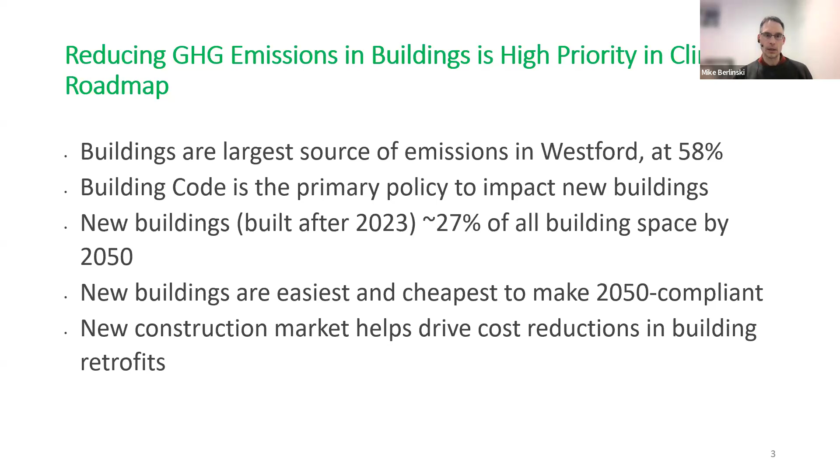We did an inventory and found that buildings are the largest source of greenhouse gas emissions in Westford at about 60%. And the building code is the primary policy to impact new buildings. There are going to be new buildings built, and then they will likely be around for a very long time, including through 2050. So new buildings are the best way to reduce greenhouse gas emissions in this sector and reach our goal in 2050. And new construction really is the focus of this effort.

One thing, how this will benefit Westford, this will help Westford meet its goal to be net zero by 2050 by reducing carbon emissions in the building sector. And it is expected to help lower some operating costs in that sector. This is an important step for Westford to be able to achieve the status of Massachusetts climate leader.

That is an advanced version of the Green Communities program. And as a climate leader community, we would be eligible for additional state funding. As an example of that, Massachusetts just released its first grant funding amount for climate leaders last fall, and that was at a level of $60 million.

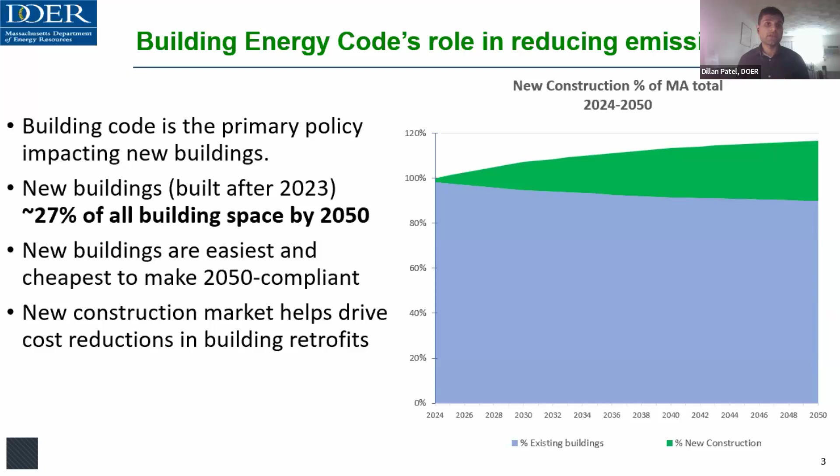Another reason why the specialized stretch energy code is a net zero code is it really takes advantage of the electric sector and the changes to the electric sector that are happening in our state. Now, right now, the generation mix in the state of Massachusetts is fairly carbon intensive. In fact, we get a lot of our electricity right now from natural gas generation. So therefore, heating with traditional electric systems, so electric resistance, is actually a lot more carbon intensive than any form of fossil fuel that exists right now.

Heat pumps, however, because they're much more energy efficient, you have air source heat pumps that are twice or thrice as efficient. You have ground source heat pump systems that are 4 or 5 times more efficient than electric resistance. They're able to heat up a space with far lower electrical emissions from the grid because they require much lower electrical demand. And that translates to lower emissions, especially when you compare it to fossil fuels.

Now, we want to take advantage of the fact that this is a dynamic situation. We expect a lot more renewable energy generation to be in the mix 25 years hence, with a lot more onshore and offshore wind, with a lot more solar penetration. And you may have had the news of Canadian hydro coming our way. So with that, we expect an electric grid that's much less carbon intensive in the future.

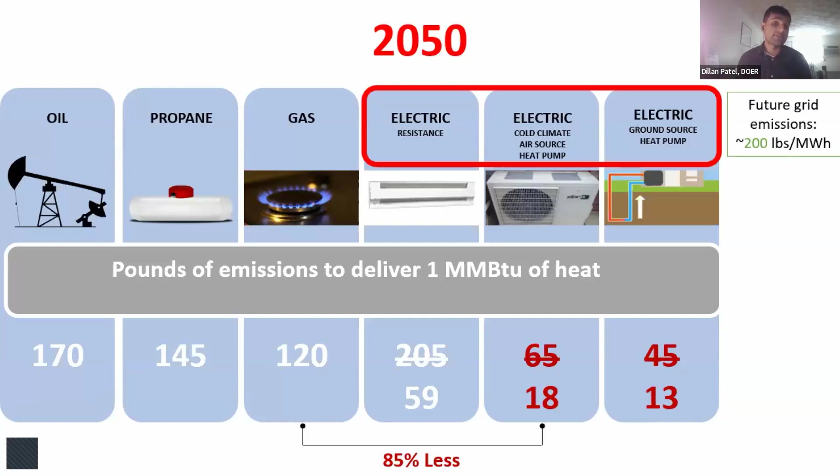And we can leverage that by electrifying our heating systems and other forms of drying and cooking and other building amenities. So with that, with air source heat pumps and ground source heat pumps, the electric emissions of heating up a space are comparatively negligible when you compare it to other traditional forms of heating.

Mike Berlinski had mentioned the Climate Leaders Program. This is a new program that the Department of Energy Resources has launched last year, and it really builds on the great projects that many municipalities across the state, including Westford, have leaned on for energy efficiency and taking their first steps toward decarbonization. The Green Communities Program has been around for over a decade and will continue to be around.

However, we acknowledge that many municipalities like Westford have had some great projects that they've implemented over time. In fact, Westford has received over $1.3 million in DOER funding since becoming a green community, doing a lot of the low-hanging fruit in terms of energy efficiency and reducing their carbon emissions. We can build on that through the Climate Leaders Program. And the specialized stretch code is one of the keys that can unlock eligibility into that program.

And in fact, Westford already has, with Mike and Tom and Beth and a lot of other great people, already established an energy committee. As Mike had mentioned, you have already a municipal decarbonization commitment to achieve net zero emissions by 2050. There's very few criteria to go to become a climate leader at this point. And so what are the rewards for becoming a climate leader?

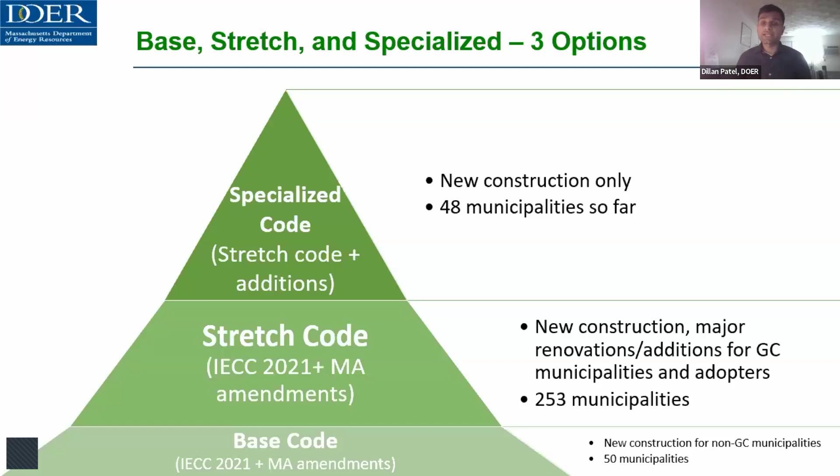The specialized code essentially exists as the stretch code with some additional requirements. And it has been available to adopt for just over 2 years, since the beginning of 2023. And in that short time, there have already been 48 municipalities adopting it across the state, representing over a third of the state's population.

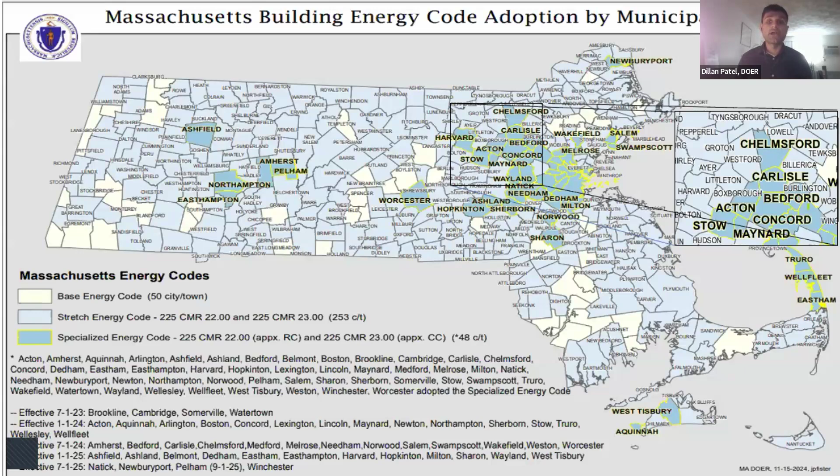And this is a map of those 48 municipalities that have adopted it, highlighted in blue and yellow outline. You'll see that there's a geographic diversity across the state. We have many in Western Mass interested in it. There are cities of different economic statuses, of different urbanisms, if you will, ranging from rural to highly densely urban environments. And you'll also notice that Westford has some neighbors that have already adopted the specialized stretch energy code, including Chelmsford, Carlisle, and Acton. So I'm going to turn it over to Michael to give more information on the specifics of the opt-in code.

Yeah, thank you so much, Dillan. So just to start off, you might be hearing us refer to the code in a few different ways tonight. Dillan said specialized code, opt-in code, things like that. So note that these phrases can be used interchangeably. So the actual code's called the Municipal Opt-in Specialized Code. So I might refer to it as opt-in code or specialized code, and that is really what the topic of conversation is.

Now, the code that Westford currently follows is the stretch code. So if I refer to it as the stretch code, that's what's currently the active energy code in the community. But if I refer to it as opt-in code or specialized code, that's what's under consideration to be adopted. So next slide, please.

So here's some just quick fast facts about the specialized code. So the specialized code is only applicable for new buildings. Any existing home or historic home are not affected by it, so it only impacts new buildings.

There are requirements in the stretch code that are applied to things like all electric homes or electric vehicle charging. And these requirements in the specialized code are the same. So if you're building a new all electric home, there's really no difference in what you're doing in the specialized code than what it would be under the stretch code. So there's nothing new to do for an all electric home, and the EV charging requirements that are in the stretch code are the same for the specialized code. There's nothing new there as well.

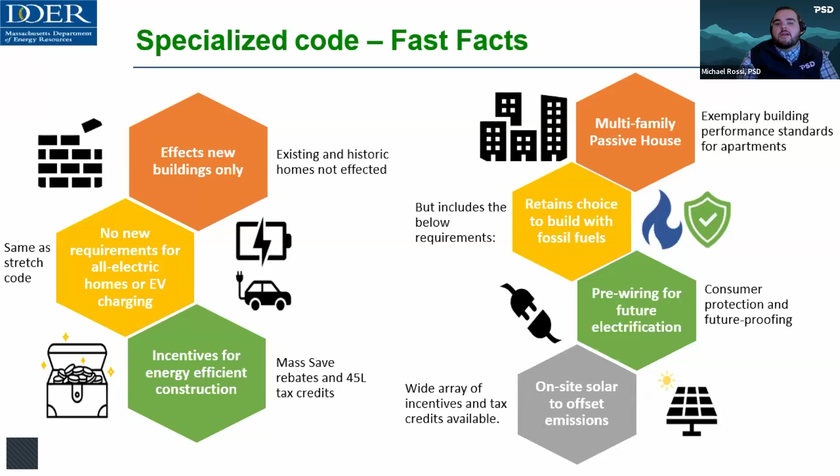So as I mentioned, all electric path, same as it would be under the stretch code, no additional changes. But if you're building a new home and choosing to include fossil fuels, also known as mixed fuel, there's the requirements of the stretch code that are applicable, plus some additional requirements that I previously mentioned. So it has to be electrification ready, also known as pre-wiring. And again, that's having an outlet nearby any equipment currently using fossil fuels for cooking, space heating, water heating, and clothes drying, as well as a requirement for a solar array where feasible.

And as I said, that requirement for solar is to install a 4 kilowatt system for homes under 4,000 square feet. And then for larger luxury homes, there's a requirement for net zero, and that would essentially be enough solar installed on the home to offset the energy use of the project.

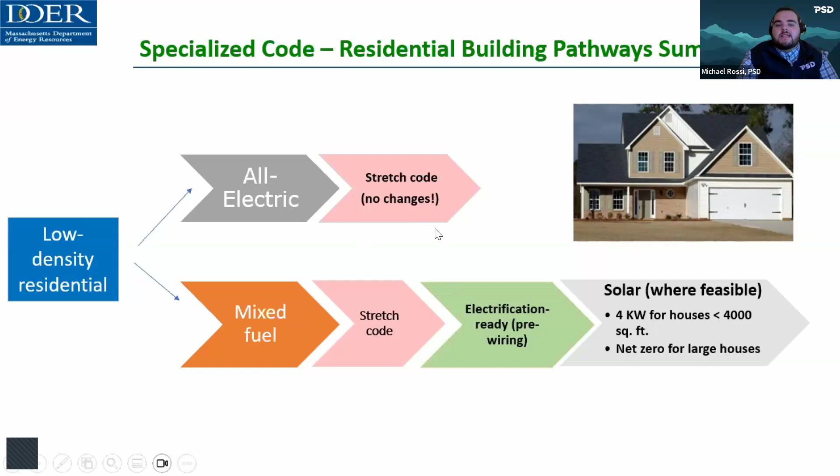So those are the requirements that are added as part of the mixed fuel buildings. We'll dig into that in more detail in the following slides too. So next slide, Dylan, please.

Great. So one of the bases of the stretch code and the specialized code is this path for most projects that follow the HERS index, also known as the Home Energy Rating System. So what a HERS index is, I like to describe it as like a miles per gallon sticker for a car, but for a house, where the lower the HERS score, the more efficient the project is.

So a HERS 100 is essentially equivalent to a new home that was constructed in 2006. Most existing homes in the state might fall around 140, 150, higher up. In Massachusetts in 2020 and 2021, the average HERS score was about a 51. And if you want to get a net zero home, using a combination of reducing the energy use of the project and solar, a HERS 0 or below is there.

So the requirements for the stretch code and the specialized code, as you'll see on the farthest box on the right, are the same for the HERS index. So the stretch code and the specialized code requirements for new construction are 42. So that's not different between the two codes, but we just wanted to call it out here because previously there was some overlap in terms of the requirements. So I guess the main takeaways for HERS is that the lower the score, the more efficient the project. The code requirements for the HERS index are the same for both the stretch code and the specialized code.

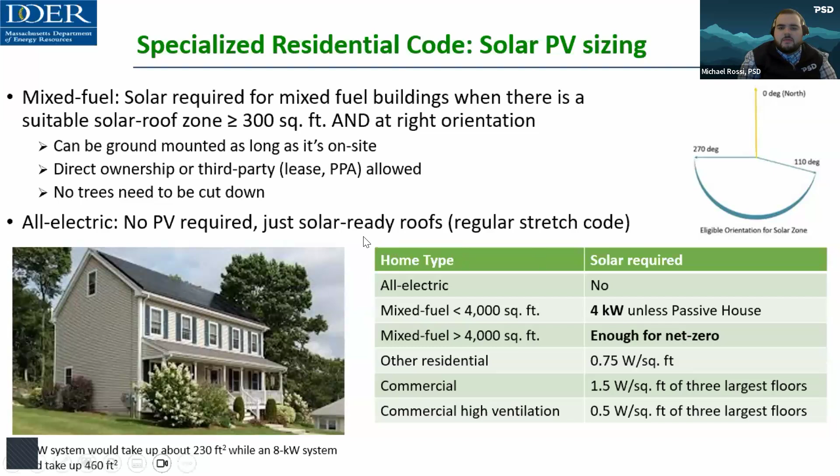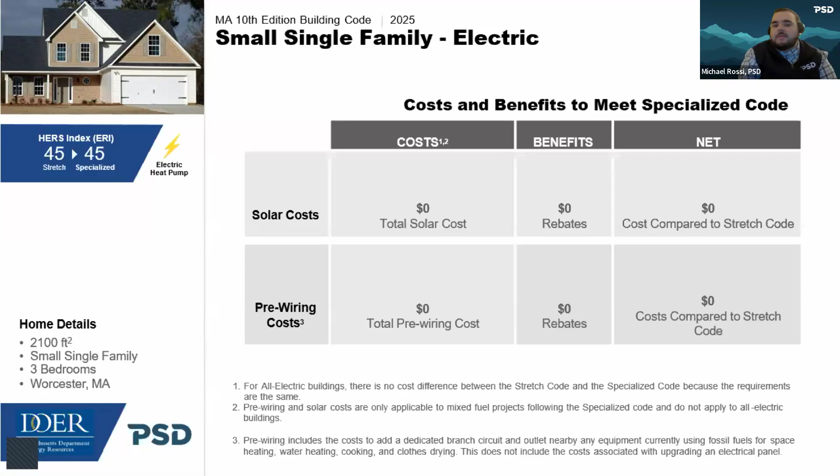But in the next slide, we'll look at some of the costs for a new building that is natural gas. Some of the costs you have to think about are the costs to pre-wire the home, and that cost is around $4,000. And then there's also adding that 4 kilowatt solar array, which is around $14,000 or $15,000. But there are also significant rebates with the installation of the solar system of about $5,500, which means the solar is only going to add about $10,000 to the project.

So the total additional costs are going to be a little over $13,000, but there's also going to be annual energy bill savings from installing the system of over $1,482. So although there are high upfront costs, you will be seeing those savings in your energy bills as well.

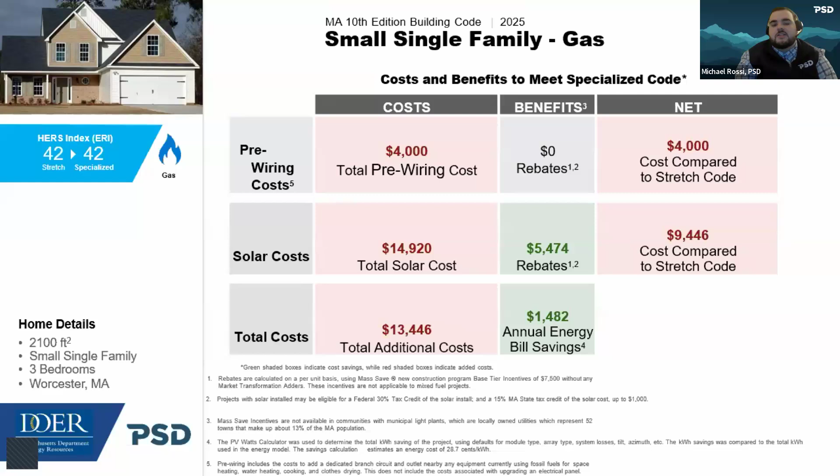All right, and then for large buildings, as we said, that's going to be buildings over 4,000 square feet. Same situation with the electric, where there's really no cost differences because the requirements are the same as they would be under the stretch code. And then for large natural gas projects, the pre-wiring cost is going to be a little bit more expensive because you have to factor in a larger area of the space. So we're estimating around a $9,000 cost for that.

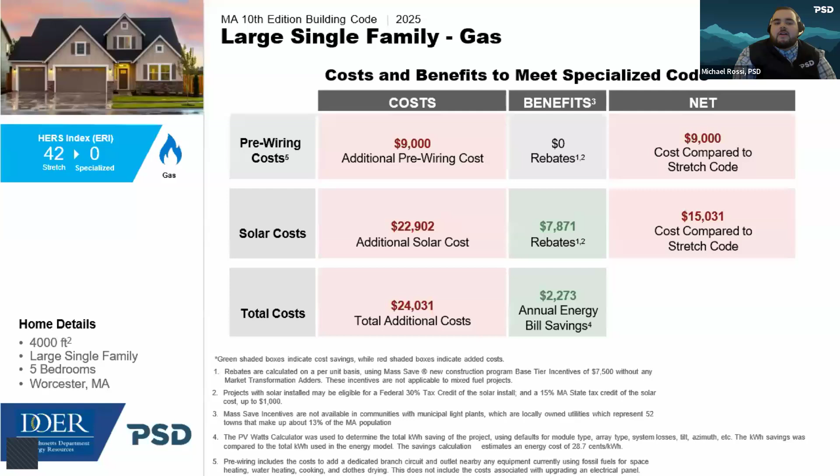And then the solar cost is going to be a little bit more too, because instead of installing 4 kilowatts, you have to install enough to get to 0. And for the project that was modeled in this scenario, the solar cost was around $23,000, but with around $8,000 of rebates. So the difference in the cost is about 15,000. And so the total added cost, if you're going to build a large new natural gas building or with propane, is going to be around 24,000 total, with $2,273 in annual energy savings. And again, these are typically the larger luxury homes that are only choosing to build with those gas systems here.

So I'll also note that there are a lot of really great incentives available, both through the Mass Save program and through the federal 45L tax credit that I mentioned earlier. And so some of these incentives include meeting requirements under the HERS requirement. If you meet a HERS 46 or scores below 46, which is typically what it is under the code, you get a $15,000 incentive for a single family project. And if the project's HERS 36 or lower, that actually goes up to $25,000 with some additional requirements baked in as well.

Then for the 45L tax credit, if you're building to Energy Star, that's $2,500. And if you're building to Zero Energy Ready Home, that's around $5,000. So a lot of really good money available on the single family side that you could get by building to some of the requirements of the code.

In some situations, it's beyond the code, but for some of the situations noted here, because a 45 is required for a new all-electric building, that incentive of $15,000 is essentially given for meeting the code, but there are a couple of things you have to do on top of it that go beyond it. And that's related to air sealing and things like that that might go beyond the code, but are still in line with the program requirements. But we'll refer to the specific program requirements for more there.

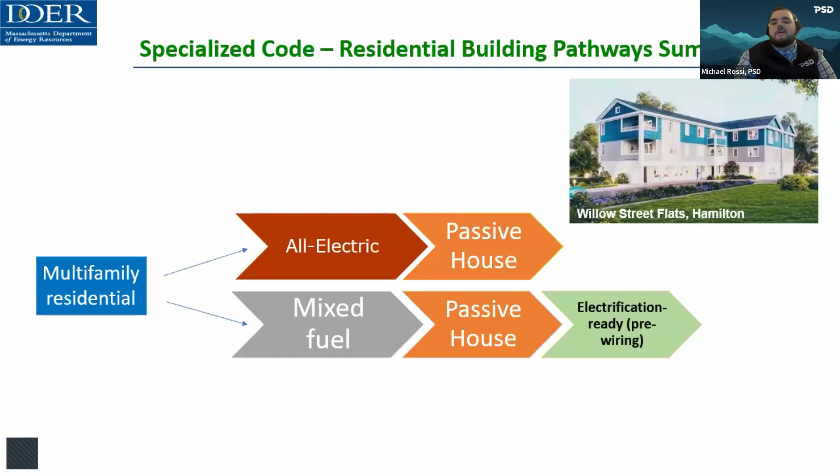And so the big projects have to be certified passive house under the specialized code for all electric. And then for mixed fuel, there is that requirement for passive house along with electrification ready, which is that pre-wiring requirement we talked about of having a dedicated outlet nearby any equipment currently using fossil fuels for the future installation of electric equipment.

All right, so this actually says what I just said in a little different way. As I mentioned, under the stretch code, there's 3 pathways for compliance: HERS, TEDI, or Passive House. But the specialized code requires Passive House certification for these new multifamily buildings over 12,000 square feet.

All right, so a little bit more about Passive House, just to lay the groundwork for anyone that doesn't know. Passive House is a third-party building verification program with 2 certifications for compliance, PHIUS and PHI. These certifications set energy performance and building envelope airtightness requirements, and can be any type of building. So even though it says passive house, it could still apply for office buildings, high rise, low rise, multifamily housing, single family, really any building.

And it does not require all electric or net zero. There's different standards that you can meet for Passive House. There's PHIUS Core, PHIUS Zero, but typically with a requirement like PHIUS Core, you might not be required to be all electric or net zero. It's just building with the design considerations in mind.

And the reason why passive houses are so good is because the heating loads can be reduced by 90% or more compared to a typical building, and the overall energy demand can be reduced by 60% or more. And with it, there's a significant improvement in indoor air quality and occupant comfort because there's so little air leakage from the home that I've heard passive houses described in a way where you can heat the whole building with a hair dryer in the winter just because of how insulated they are.

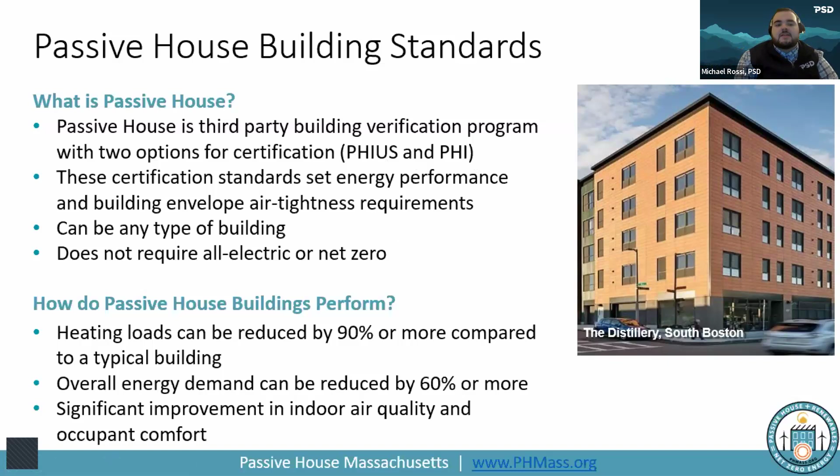So that's just a little bit about it. And that's just one project in particular, but I'm sure it applies elsewhere too. So that's not applicable in all cases, but typically, as I said, very well insulated, very high performance, and very low heating load for these buildings.

All right, so there are questions that have been raised around affordable housing and passive house, but we find them to be a great mix. Part of that's because you're going to have lower utility costs for tenants and the developer, and better indoor air quality because you're building a home with all those principles of building science in mind, which lead to lower health impacts from indoor pollutants. So you might have fewer cases of asthma or less or no mold and mildew accumulation that you might get in a typical unit.

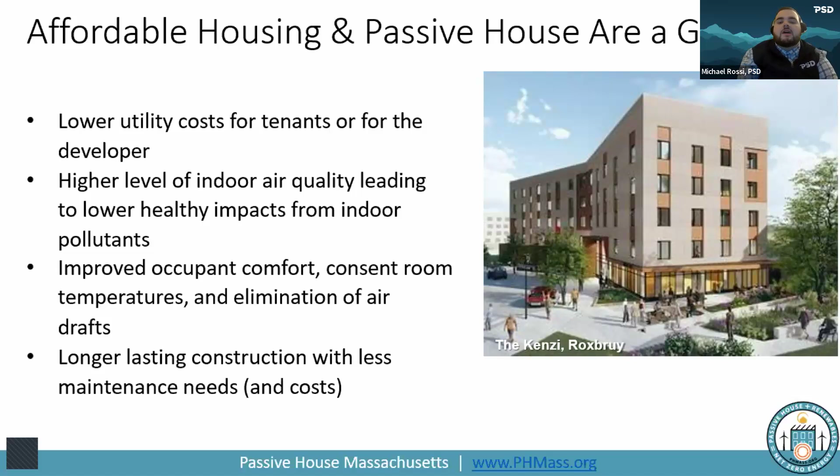It improves occupant comfort as well because there's a consistent room temperature and elimination of air drafts. And a big thing with passive is because it's designed so well, the construction lasts longer and there's less maintenance needs and costs, because the systems in the building are able to perform as designed rather than oversizing a system that breaks down quicker or undersizing a system that doesn't meet the requirements. So because of the way these projects are designed, there's typically better occupant safety and comfort.

All right, and for multifamily buildings, passive house is actually becoming more common. Currently there's over 13,000 units of multifamily housing pursuing passive house certification in Massachusetts. Over a third of these projects are categorized as low income projects and the rest are market rate housing. So over 13,000 are currently enrolled to be passive house. That's a really big milestone in the state, and I'm sure it's going to continue as some of these code provisions take effect and as more communities adopt this specialized code.

All right, so we talked a little bit about the single family incentives, but here's some multifamily incentives that are also available for meeting some of these program requirements. Passive house apartments are awarded 8 points in the low income housing tax credit applications. And projects that are eligible for Energy Star or Zero Energy Ready Home must get these certifications to get passive house certified. So essentially, you're building on the program requirements with passive house because these buildings have to be certified Energy Star or Zero Energy Ready Homes. So you have those building blocks to be eligible for a lot of really great incentives out there. And low operating costs is another big piece of it.

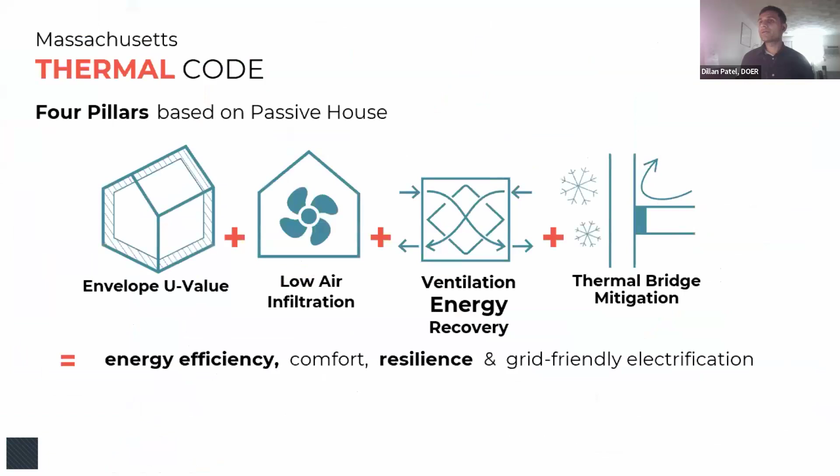So there are two considerations, two slides that I put in on where the grid is going and how the specialized opt-in code may impact the grid. So number one, there has been concern outside of energy code discussions, just in the way that the grid is going, because of the growing share of renewable penetration, grid outages, the rise of electric consumption after so long, with new economic growth, with AI industries. And so with all of those factors in mind, DOER, with other stakeholders and working groups, have launched what's known as the GMAC, the Grid Modernization Advisory Council.

And the GMAC is a committee that works with the investor-owned utilities, National Grid, Eversource, Unitil, to develop what's known as electric sector modernization plans. The three main utilities submit these to the Department of Public Utilities, and it is a long-term plan for how each utility plans to invest to increase the strength and capacity of its grid.

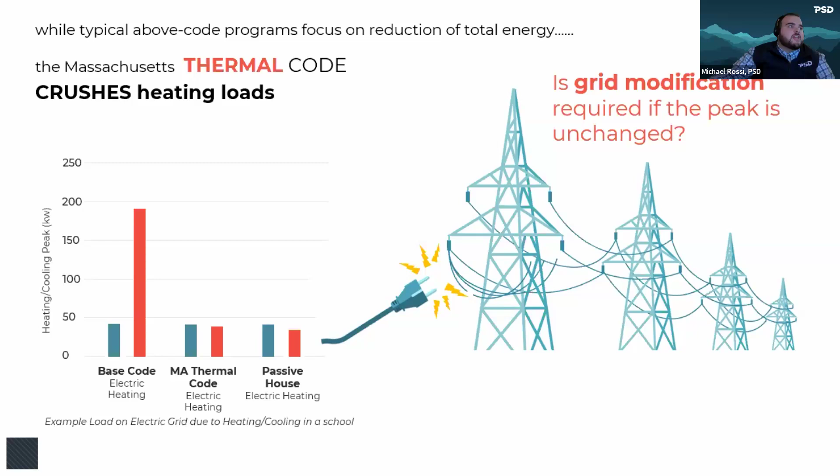So, the HERS index requirements previously for ADUs was the same as they were for new construction, but they actually lax some of those requirements in the new update. So, if you're building a new ADU that's mixed fuel, the requirement is a HERS 52. If you're building an all electric project or a mixed fuel building with solar installed, it's a 55. And if you do both all electric and a PV system in that ADU, the requirements are HERS 58.

So when a HERS rating can be done on an ADU, as tested as a separate dwelling unit, it doesn't matter if it's attached or detached. A rating can be done just on that ADU space. So when you're looking at something like an addition, and again, this is in the stretch code, not in the specialized code, because specialized code doesn't have any impacts on additions.

When you're doing an addition, for example, you'd have to rate the existing portion of the house and that addition space. But for an ADU, you can just rate the ADU space and not the rest of the home that it might be attached to. And that's because there's a separate living space primarily for that dwelling. So that has a kitchen, a bathroom, a private bedroom. So typical requirements of an ADU are also there.